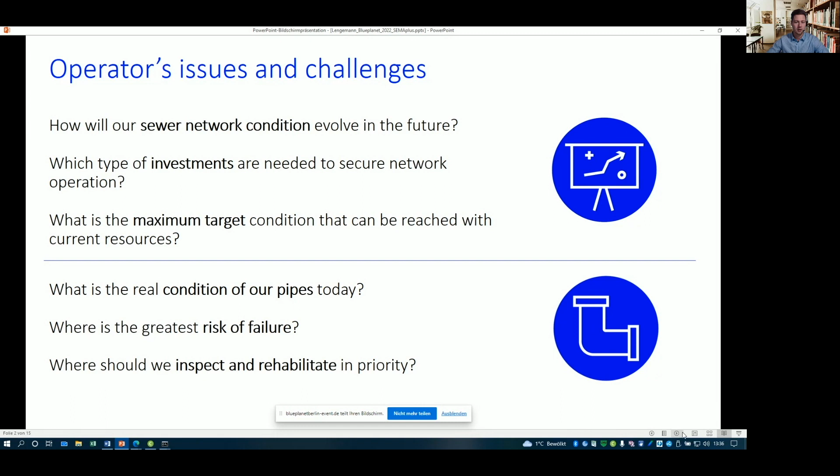So this on the strategic side, and on the operative side, maybe what is the real condition of our pipes today? Where is the greatest risk of failure? Or where should we inspect and rehabilitate in priority? So with our developed tools, we are able to answer these questions. But before I step inside the tools, I give you a short clip, an underground view of our topic, and I hope the video will play.

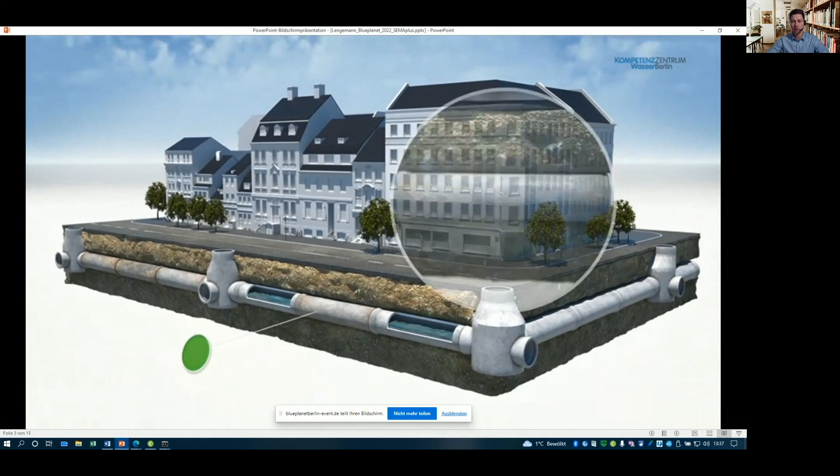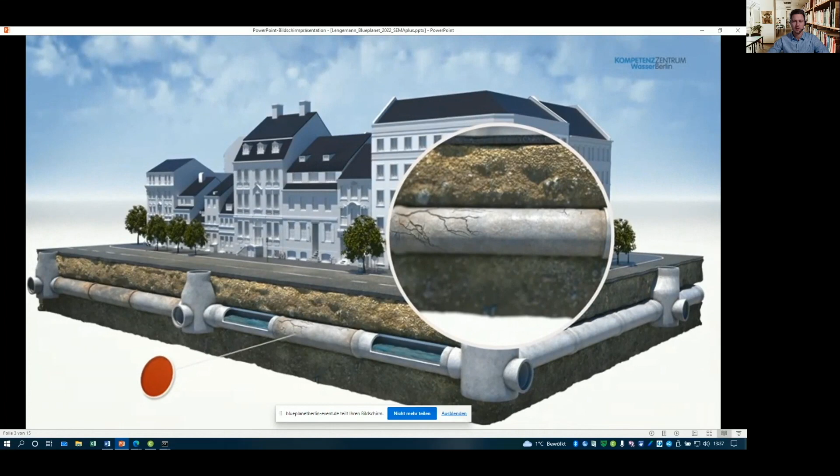Yes. So the sewer pipes, not only in Berlin but all over the world, are mostly underground and hidden from our human eye. Because of that, it's difficult to inspect the current condition without special equipment. So CCTV inspection, as state of the art, enables us to assess our sewer condition. Here in this video, the condition develops from green to red, so from good to worst.

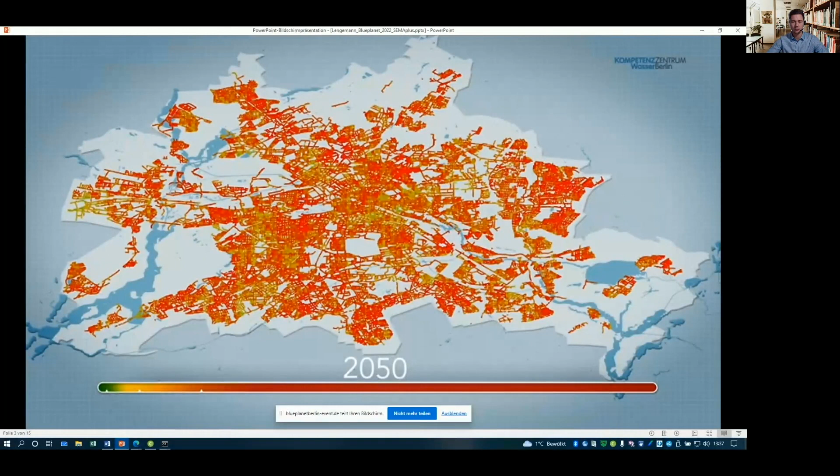And now you can see, without any rehabilitation program, the future condition of our sewer network will not be able to fulfill the task. So we need a rehabilitation strategy for our sewer network, but we need those tools to get the perfect or the best strategy. And now, sorry, next slide.

I will go on and show you some insights of the two simulation tools we developed. First, the strategy simulator. It forecasts the long-term development of the complete sewer network condition over several decades. And the second, the pipe simulator, predicts the current condition of individual sewer pipes and helps to localize urgent rehabilitation needs, called hotspots.

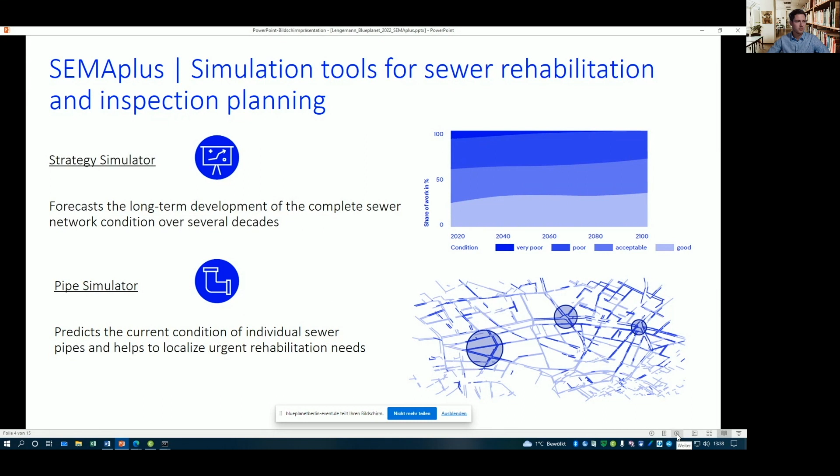At this moment, I will leave the presentation and give you a short live demonstration of how the tool is working, so you can better understand what we are doing and how we can get the benefit out of the tool. I did some preparation, so it is faster in this live presentation. So you can see the online web application strategy simulator. You have different stages. The first stage is where you can make your input. So not only in Berlin, every sewer network can be uploaded with the network data here.

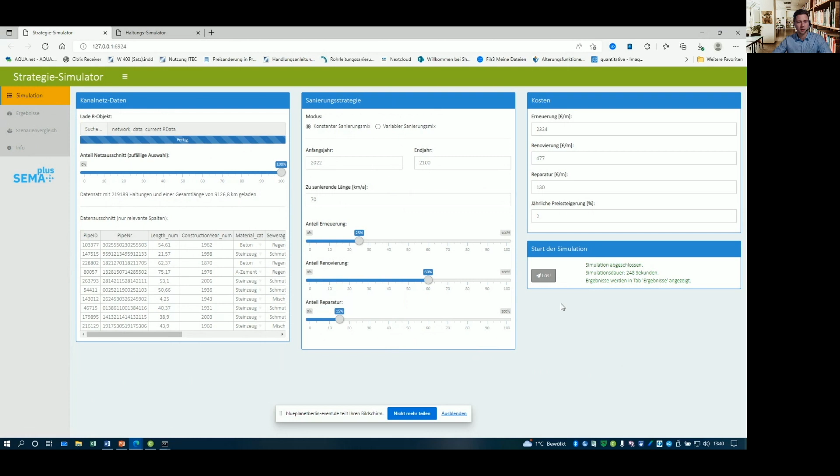And in the second step, you can put your rehabilitation strategy parameters, so about the years, about the performance, and the different rehabilitation, like renovating or the classical rehabilitation. And if you have done these pre-settings, you can simulate your strategy and get a result. I've already done this, so it's a little bit quicker. You've got here different charts: a chart about the performance, about the condition, about the cost, age, or substance, and then you have a nice portfolio about your rehabilitation strategy.

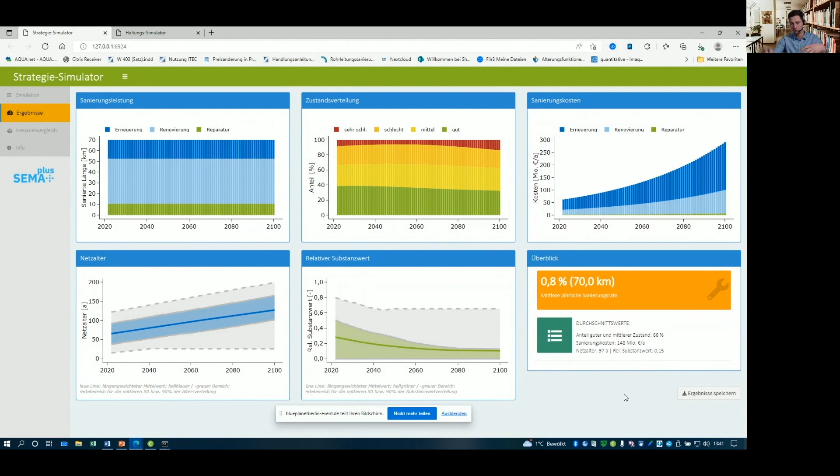And in the next step, if you have various opportunities to create a rehabilitation strategy, you can simulate, and then you can compare. This is the next stage where you can compare different scenarios, example 1, example 2, and with this comparison make the best decision for your company or for your sewer network, and argue with your management or your government why you need that budget to keep your sewer network in a good condition.

So let me get back to the presentation. This is also important for us, that we can convince our management or the government, because we wanted to implement the strategy simulator, and therefore we needed a proven accuracy. So we took our sewers as not inspected and simulated the aging to the current inspected status. It was helpful to have inspections we can simulate to, so we can check the accuracy on network level.

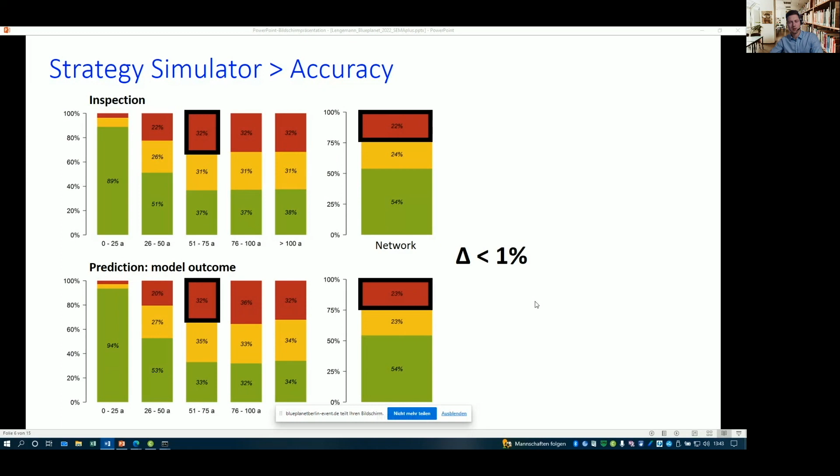I've not got much time, so I jump to the pipe simulator. The pipe simulator is helpful for operative asset management. It is for the prioritization of our pipes with a high risk of failure, so we can make targeted CCTV inspection and rehabilitation. We use a machine learning model, random forest, and this model uses several variables relating to sewer characteristics and environmental factors, like material, diameter, soil, groundwater, trees, or the location.

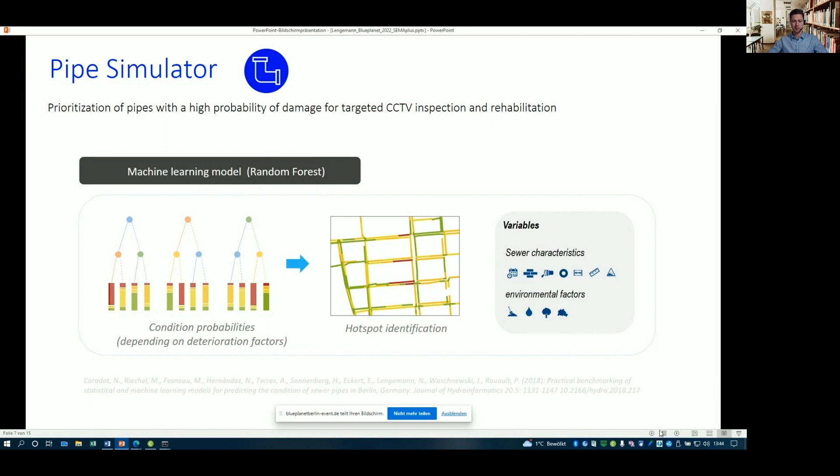The random forest model uses decision trees, and each branch is a prediction. So the model tries, related to the settings, the best allocation, about the branches, maybe age, material, or the depth. Every branch is a prediction, and it's used for short-term and individual condition simulation. So I'll also give you a short demonstration of how the simulator works.

It's also an online web application where you can put in your network data and inspection data, and as a result, when you simulate, in step one you get a list of all pipes in your sewer network, ranked: if the risk of failure is highest, the pipe is at rank number 1, and as you go down the ranks, the risk goes down. So you can merge the list with your inspection program and find hotspots where you have to prioritize your inspections.

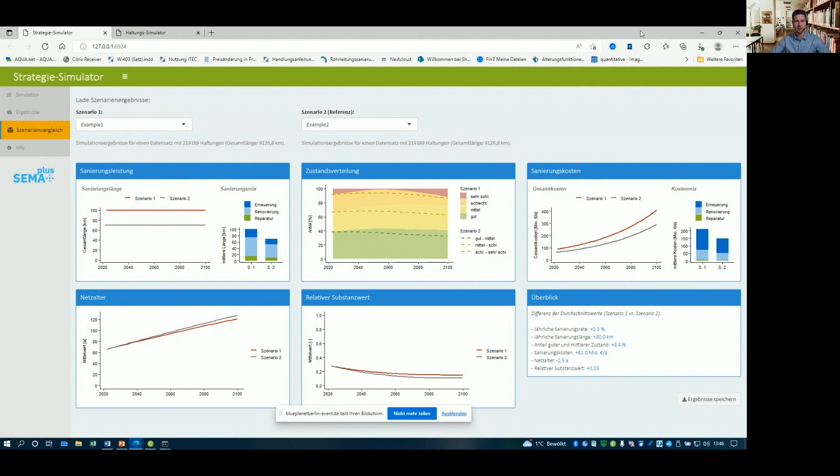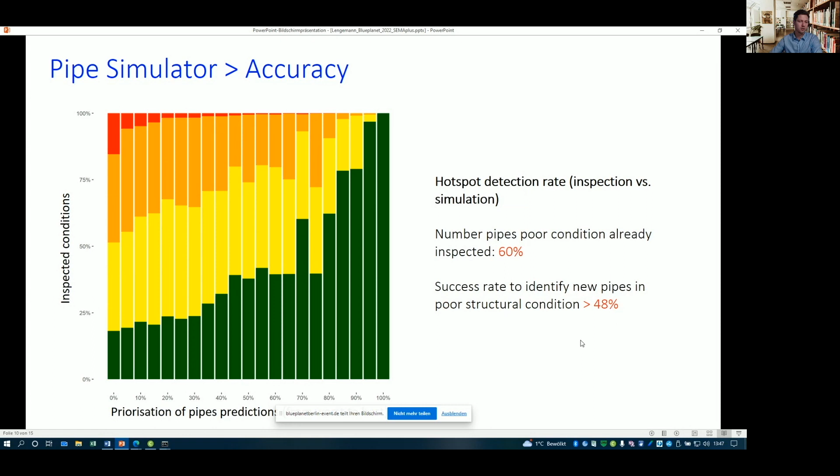But in Berlin, we have our complete sewer network already inspected. So the benefit is not as high. But when we did our inspection program in the past, it was all over the city. And now we can concentrate on the hotspots and don't waste our time finding pipes in good condition.

So yeah, in conclusion, our benefits for the Berliner Wasserbetriebe on these two levels, network level and pipe level. First, the network level, the strategy simulator. Now we have a valid forecast of the condition development of the 10,000 kilometers sewer network in Berlin. Like I showed you with a comparison in the strategy simulator, we can optimize our strategies. So with our scenarios, our investment planning every year, we have a data-driven validation.

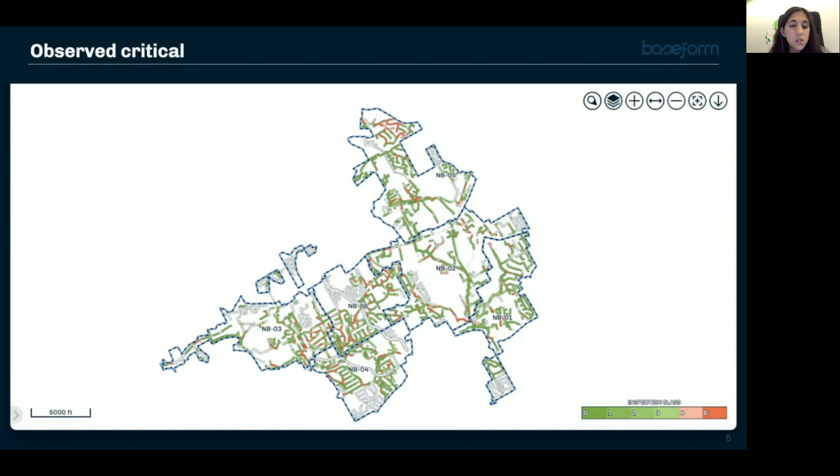trying to analyze. So Baseform uses this information on the grades and also uses the pipe features such as material, length, diameter, age. Sometimes we even correlate with other variables, could be distance to railways, distance to trees, could be related to the soil as well. And we create a map with the predicted critical pipes. This prediction is carried out using decision trees. So this map here is already colored. Every pipe on this map is color coded, as you can see.

Essentially, we have used the observed inspection classes and then generated trees using a random forest algorithm to identify key variables that explain criticality in pipes. Age is usually an important factor along with material. Sometimes zone or the area or the basin is also important because it's a proxy for similar construction methods. But essentially, this map shows the pipes color coded according to their criticality from the decision trees that were generated in the AI model.

One of the main advantages of this AI model is that it's very fast building. It has a good performance when compared to support vector machines or other neural networks, and enables the identification of key variables and makes no assumption about the data. This means that the results that you get are literally as good as the data coming in. But this can be a problem.

So this is really important because it's critical for the utilities to understand that they should be using a standard defect methodology, to make sure that all the data is processed in the same way. We need a standard. There's a very unified standard in the US. In Europe, not so much, and this tends to vary very much from country to country. That may vary, but it's important to have a standard procedure.

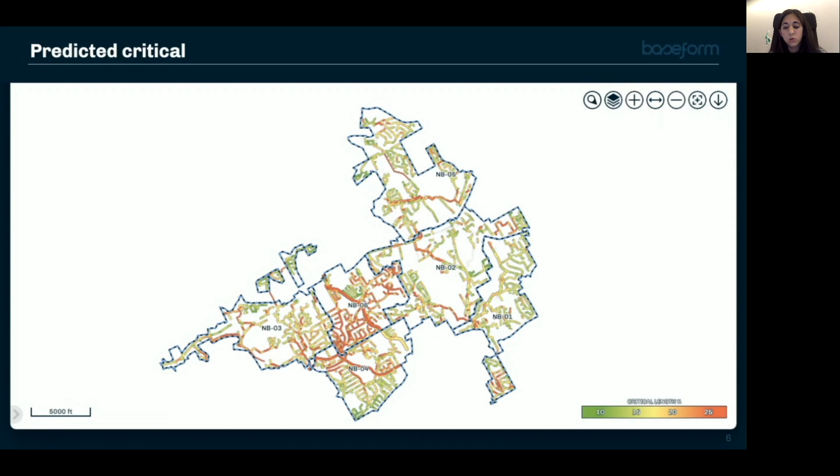Because we are not a black box, our model is explained by key variables, and if age is in place, in the highlighted pipe, it's a very old pipe with a given material. So it's important that everybody using the software knows why the pipes have their criticality, what is the rationale behind these predictions. We really strive to make people understand what they are doing. Then the next question is, how good is this model? Is it really worth using AI in this particular case?

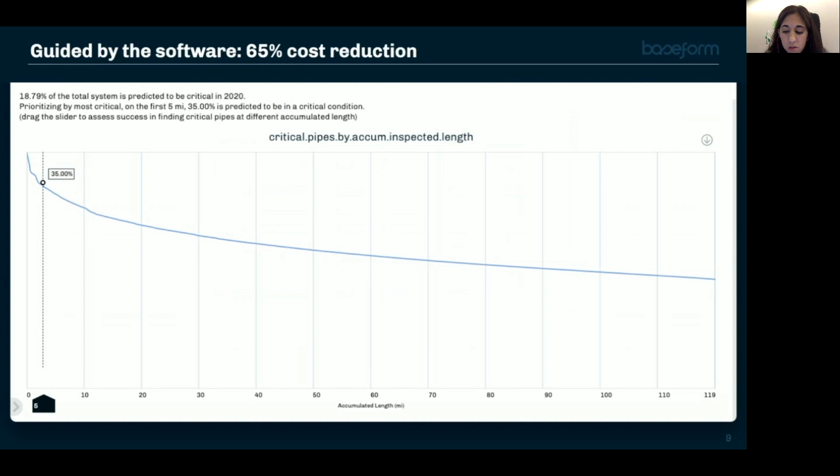However, some utilities want to use the information from this app to create renewal plans for wastewater systems using cost and risk dimensions. This is also possible on Baseform. Okay. Now I've talked about the prediction side using the inspections, but if I have some more minutes, I would like to take you to the monitor part of it.

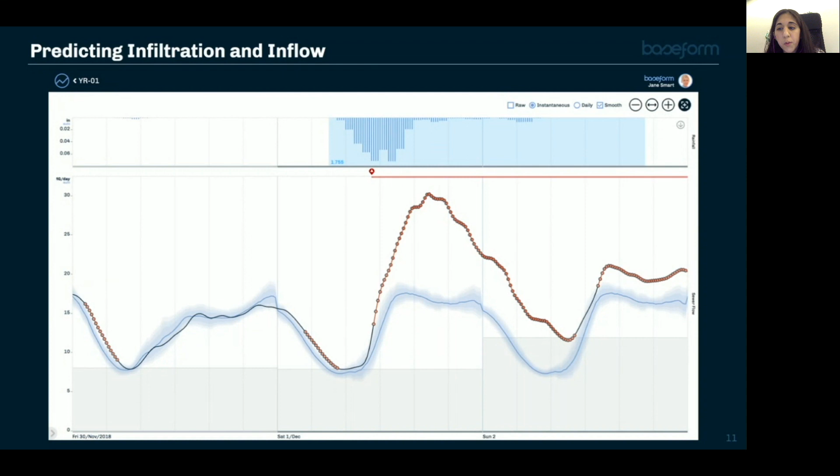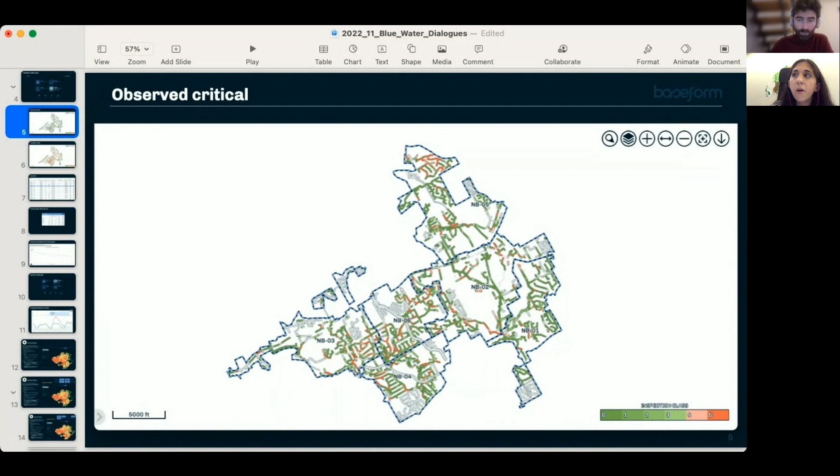Okay. So here we are showing the grays that have never been inspected, and the colors. The color scale is from green to red. So the critical ones are in pink and in red. And in the next one, they end up with a critical length.

Okay, so we can identify for each pipe what is the percentage of critical length in each pipe for the model. Okay, so that's the prediction coming in. So what is the percentage of criticality? What is the probability of that pipe being critical?

Okay, thank you. Maybe a next question is related to AI or the machine learning approach you are using. So as you say, there is no assumption in the model, meaning the model is learning from the data. Exactly. So do you sometimes have issues with extrapolation in the future? If you see only young pipes, how will you predict the evolution over time of these pipes, since you never observed old pipes? Yeah. Here we really need to rely on a very good experience looking at the data, okay?

Because this model really has that disadvantage. So we need to be careful. I mean, with this inspection analysis, it's always like a poll, okay? So it's like a poll before the elections. If you want to try to predict which candidate will win the elections, you need to make sure that your sample will mimic or will have a good representation of your network. So it's the same here.

So you need to make sure that you try to have a little bit of each in your inspections data. Another way of looking at it is with Baseform's big data. So we tend to collect and to have lots of data that help us identify what makes sense and what doesn't. So there's also that side.